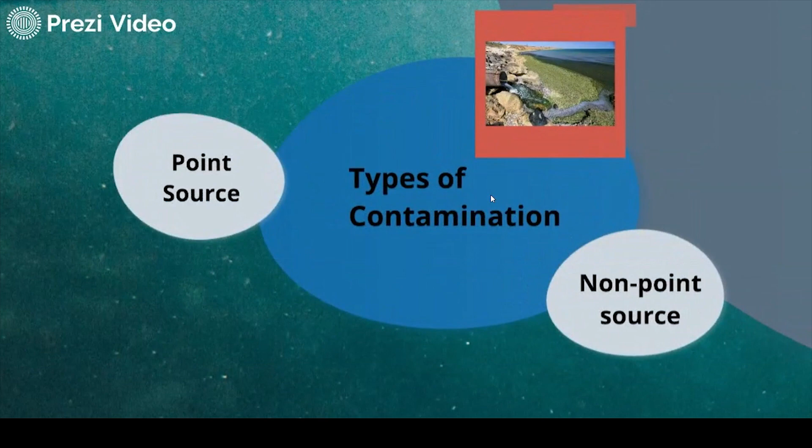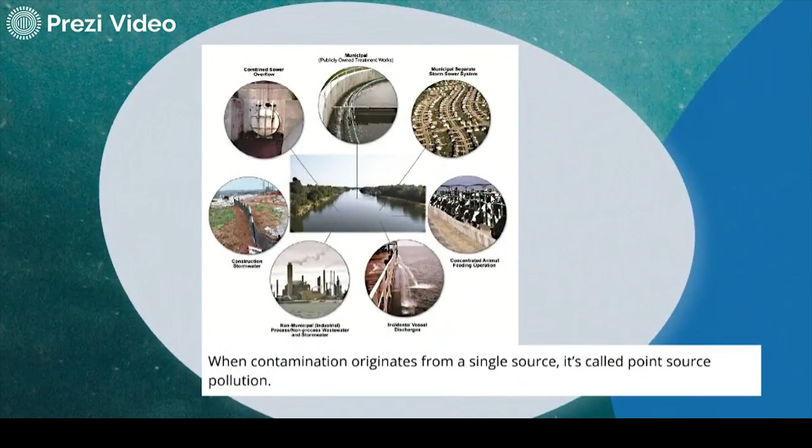Water contamination. Types of contamination. Non-point source: contamination derived from diffuse sources is called non-point source. Point source: contamination originating from a single source is called point source.

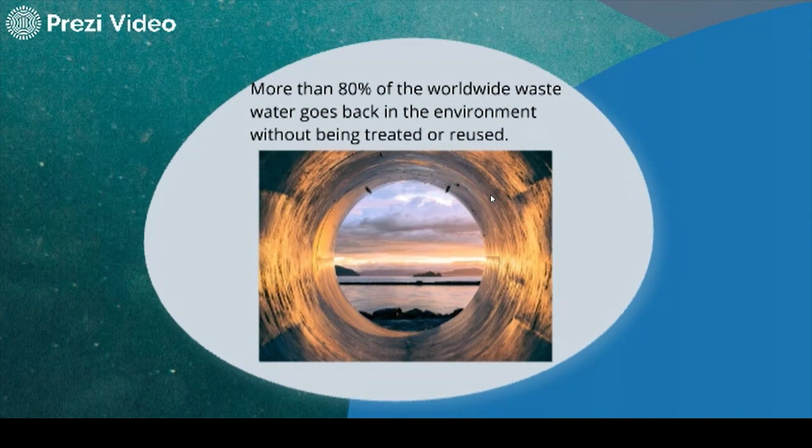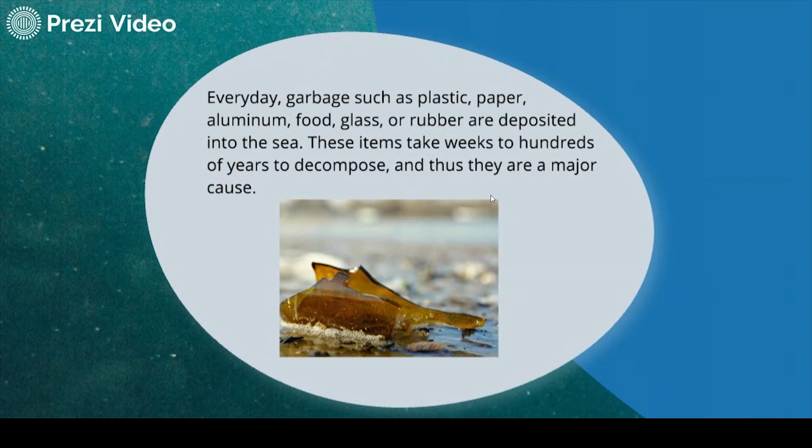Main causes. Sewage and wastewater: more than 80% of the worldwide wastewater goes back into the environment without being treated or reused. Marine dumping: every day, garbage such as plastic, paper, aluminium, food, glass, or rubber is deposited into the sea. These items take weeks to hundreds of years to decompose, and thus they are a major cause.

Industries: a huge amount of industrial waste is drained into fresh water, which then flows in canals, rivers, and eventually into the sea. Agriculture: agriculture has an impact on water due to the use of chemicals such as fertilizers, pesticides, etc., running off into the water.

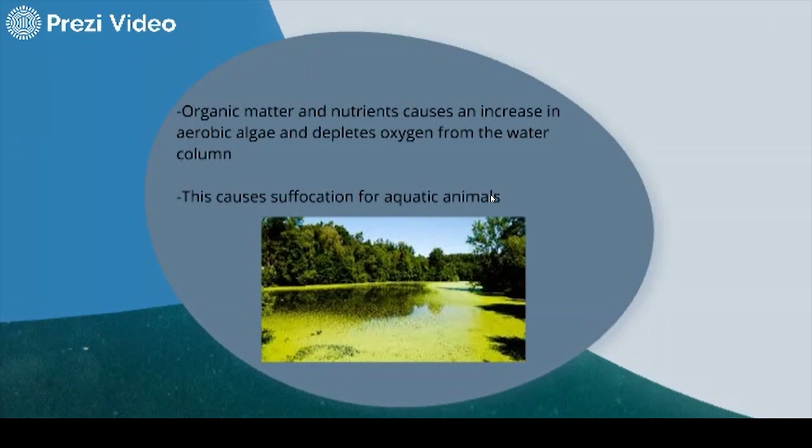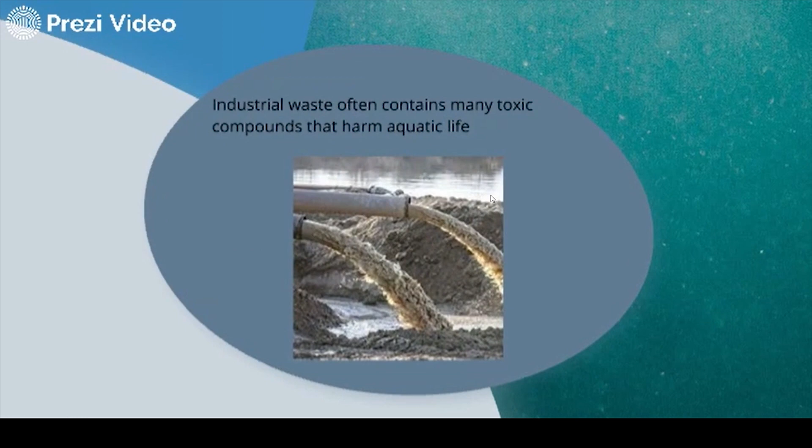Techniques: wastewater treatment, green agriculture, stormwater management, air pollution prevention, plastic waste reduction, and water conservation.

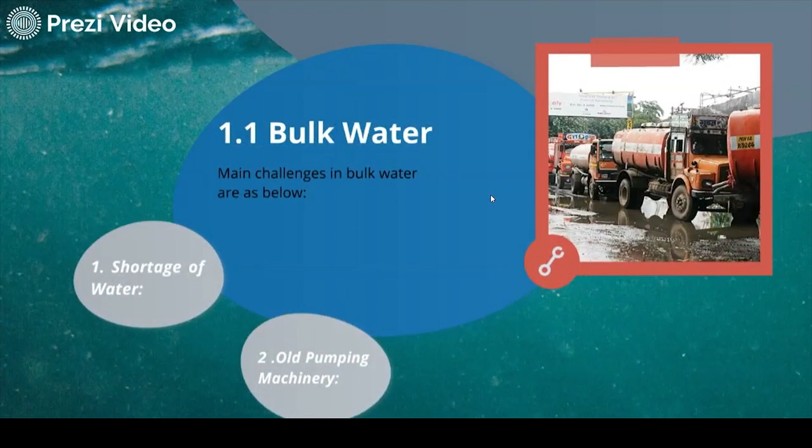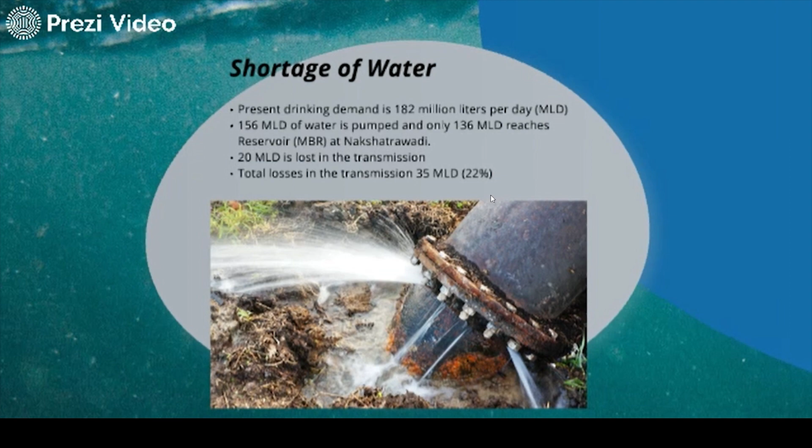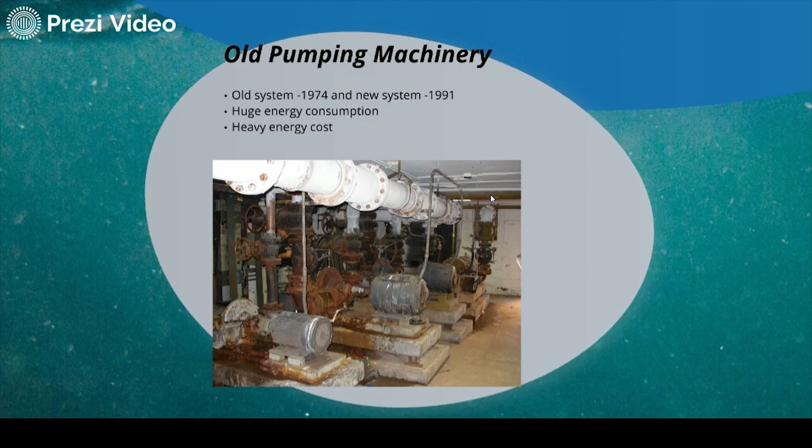Water supply problems in Aurangabad. Challenges: bulk water, shortage of water. Present drinking demand is 182 million liters per day. 156 million liters per day of water is pumped and only 136 reaches the reservoir at Nakshatrawadi. Old pumping machinery: the old system was installed in 1974 and the newer in 1991, and huge energy consumption has been seen. Heavy energy cost.

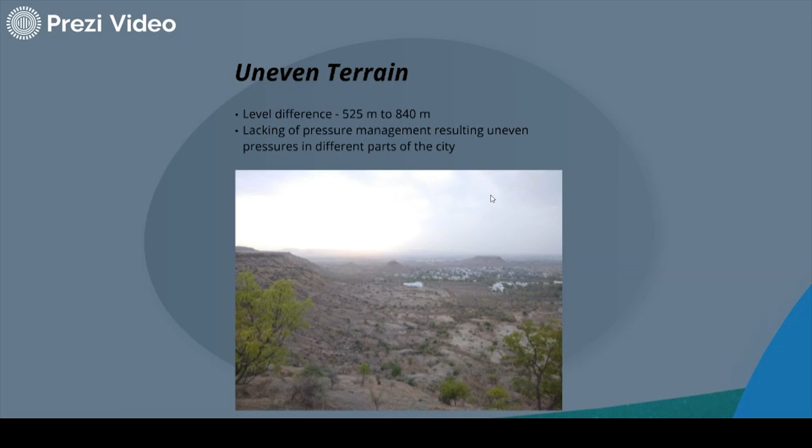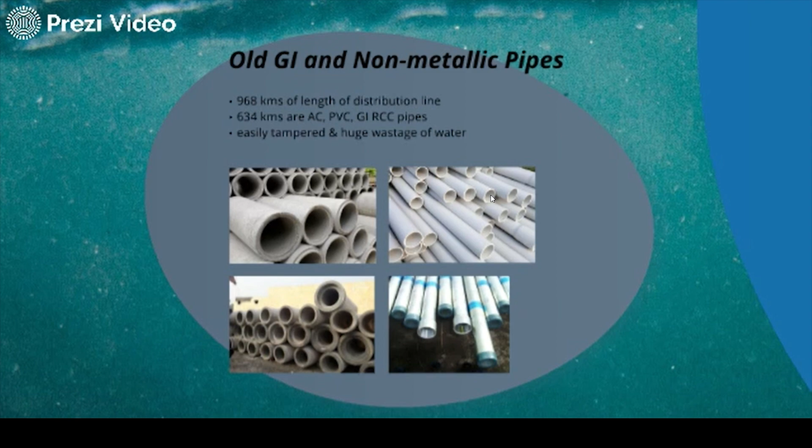Main challenges: uneven terrain, lack of pressure management to cope with the level difference, old galvanized and non-metallic pipes, easily tampered with, and inefficient water supply, high non-revenue water, numerous leakage points resulting in high non-revenue water.

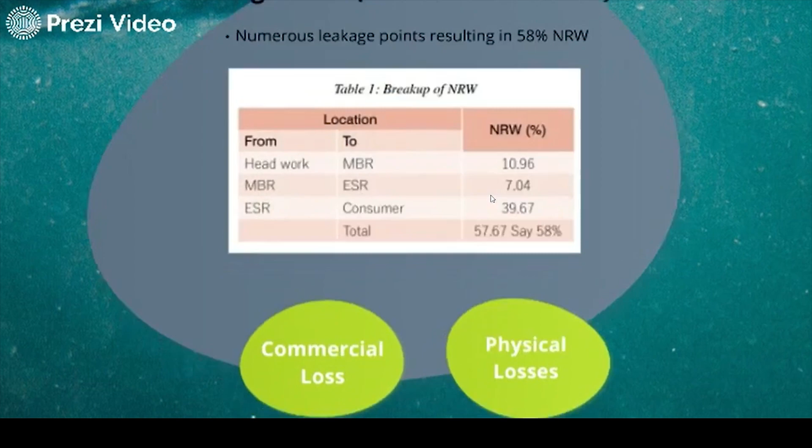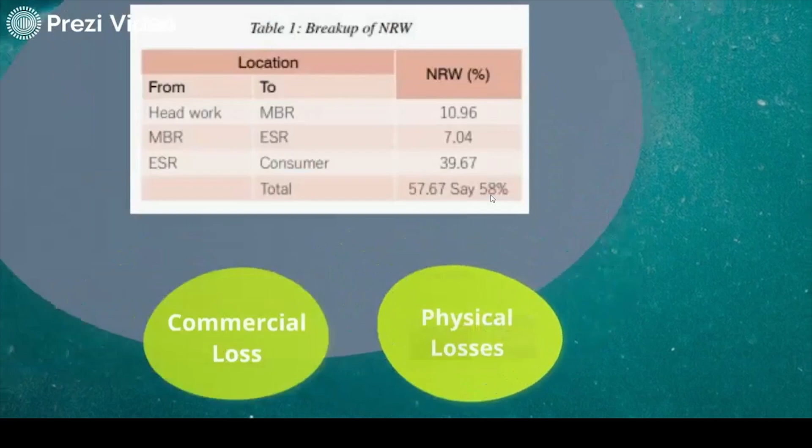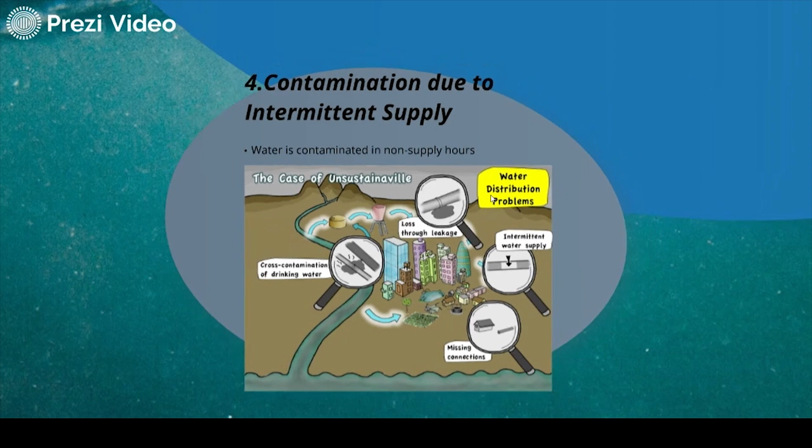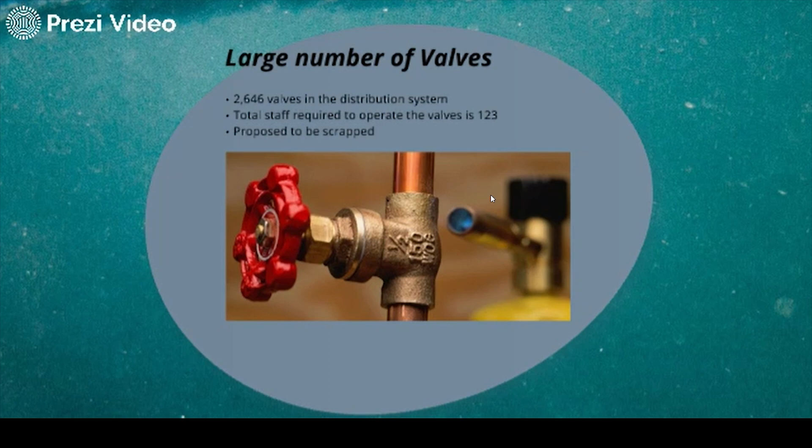Contamination due to intermittent supply: water is contaminated in non-supply hours. Supply hours: residents only get water for 45 minutes, once in 2 days. Large number of valves: a large number of valves required staff to operate. Improper operation zones: pipelines are laid in a haphazard manner, thus causing residents to get less water with less pressure.

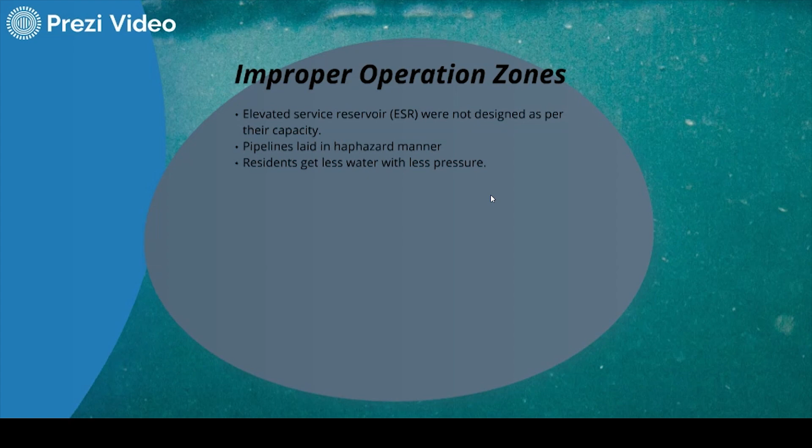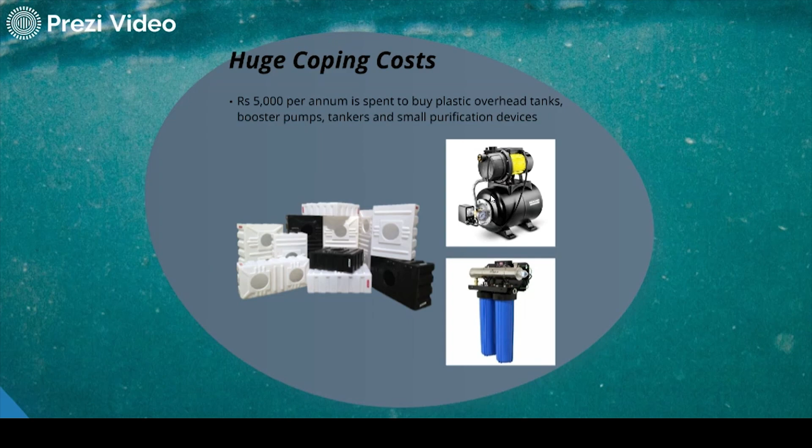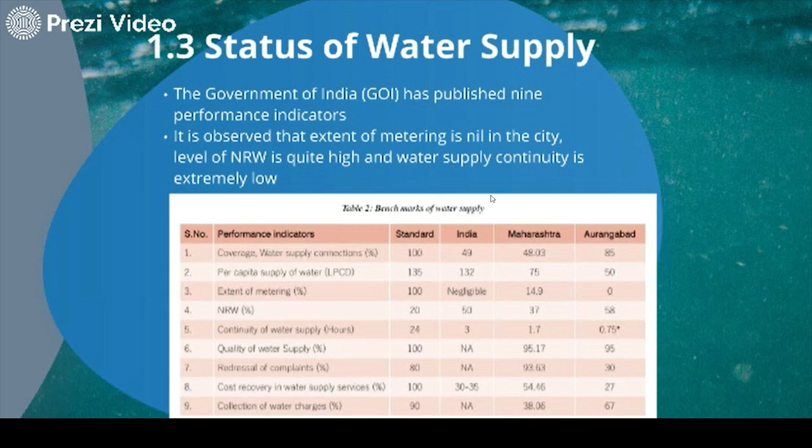User coping costs: Rupees 5,000 per annum is spent to buy plastic overhead tanks, booster pumps, tankers, and small purification devices. Status: it is observed that the extent of metering is nil in the city. The level of non-revenue water is quite high and water supply continuity is extremely low.

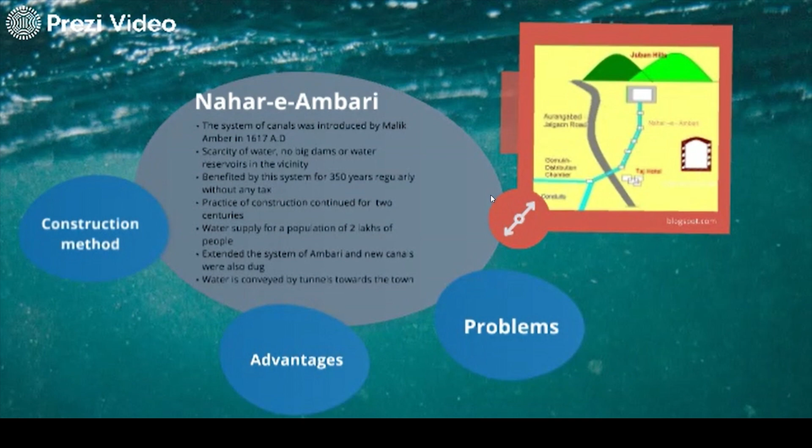Case study: Nahar-e-Ambari construction method. Nahar-e-Ambari is a water purification system which has benefited the residents of Aurangabad for 350 years. Water flows down a slope for more than 4 kilometers. This system consists of collection of groundwater from an underground spring flowing down the Juban Hills towards the Sangavi River.

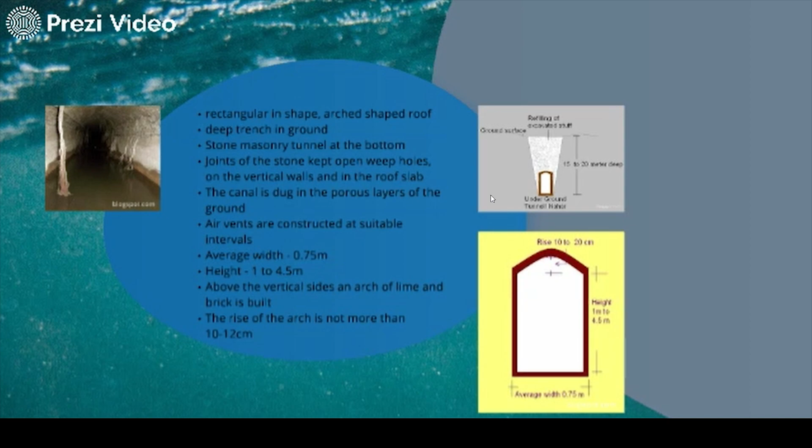The underground channel is constructed deep into the ground with rectangular structures with arched roofs constructed 15 to 20 meters below the ground. The water is then distributed in the city through buried terracotta pipes. Though it is an efficient natural purification system, it also has its cons.

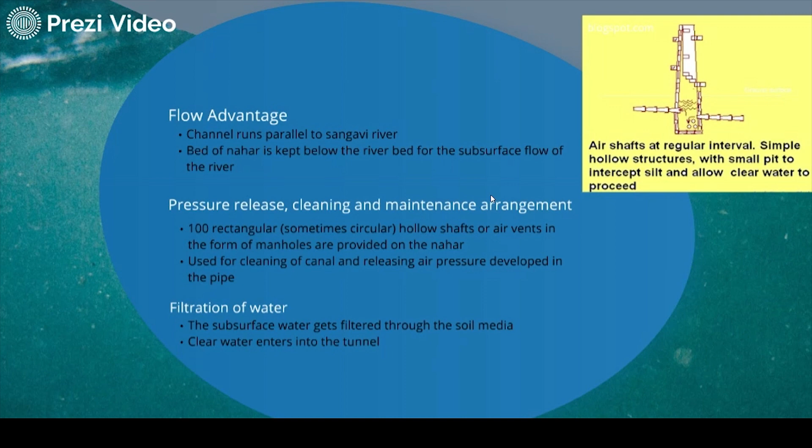Advantages. Flow advantages: the channel runs parallel to the Sangavi River. The bed of the Nahar is kept below the river bed for the subsurface flow of the river. Pressure release, cleaning and maintenance arrangement: 100 rectangular, sometimes circular, hollow shafts or air vents in the form of manholes are provided on the Nahar, used for cleaning of the canal and releasing air pressure developed in the pipe.

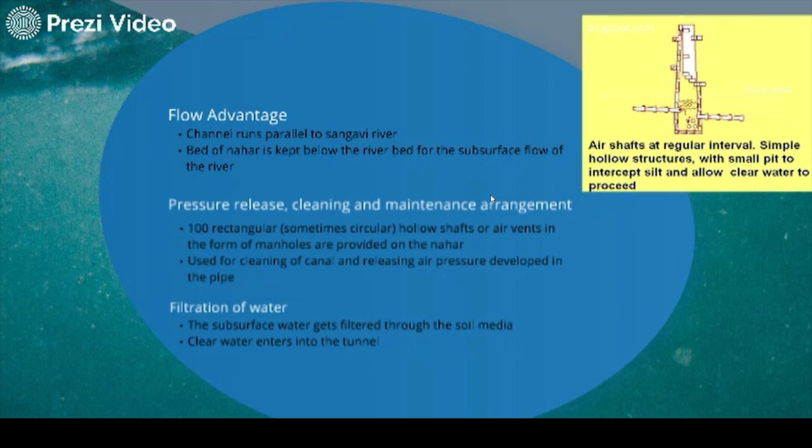Filtration of water: the subsurface water gets filtered through the subsoil media. Clear water enters into the tunnel. Problems: the discharge of the Nahar is reduced to a large extent. Some of the reasons are that a number of farmers in the vicinity of the Nahar are lifting the groundwater with the help of electric pump sets. The quantity of subsurface water percolation into the Nahar is thus reduced.

The subsurface flow of the Sangavi River is reduced due to exploitation of groundwater and removal of sand layers, thus underground storage is reduced. Silt and debris are accumulated in the Nahar. Roots of trees are entering the Nahar, causing obstruction to the flow. Lifting water directly from the Nahar reduces the further flow.